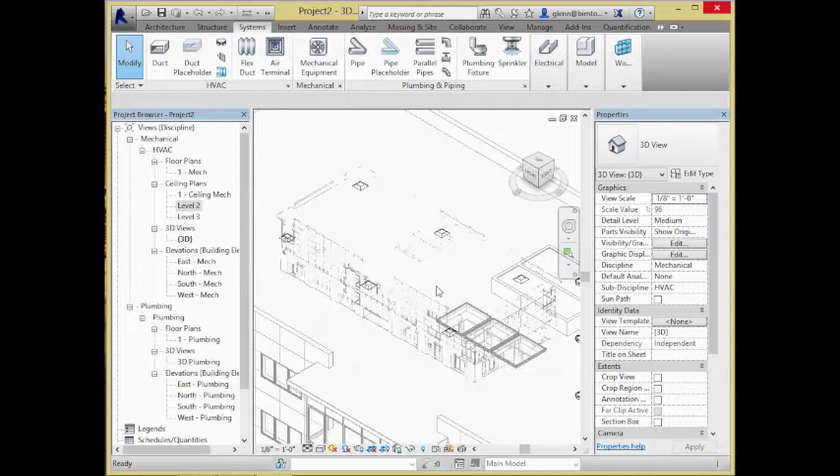You can see, oh, there's some ductwork kind of hanging around in there. There's some registers. They're not looking too bad. Let me rotate it around a little bit. You'll see they seem to be at about 8 feet above the second floor right now. That's kind of doing okay.

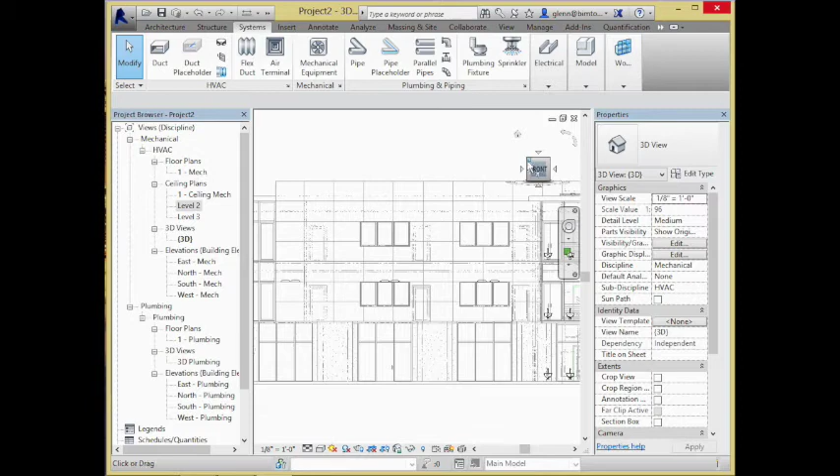Let me go through and do this. Let me rotate this around again. And what I'd actually kind of like to do is, in this view, kind of scalp off the top of the building so I can sort of see the ductwork so I can be placing in 3D very easily.

So to do that, what I'm going to do is turn on this thing called the section box. Okay, the section box you'll see is just hiding from us right now. That's all that's really going on. I need to make it visible. See if I can make it visible.

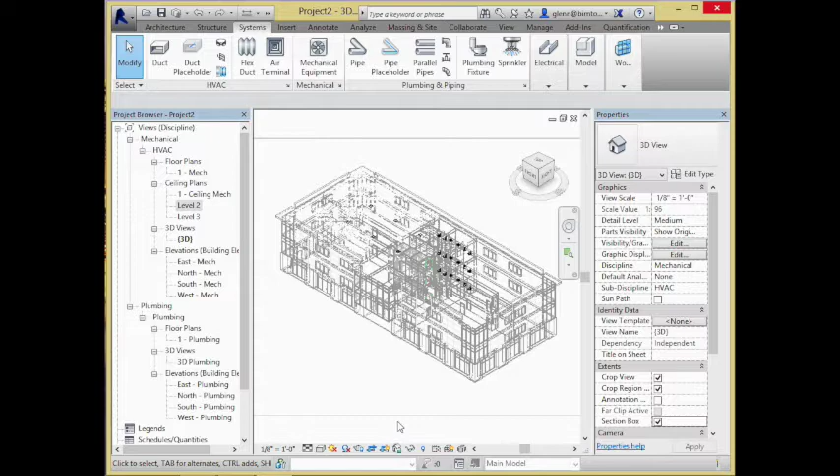Actually, it's the crop region. This is the things that are hidden. Let me unhide it, just so I can see it explicitly. There's the section box. Now I can push and pull on this thing.

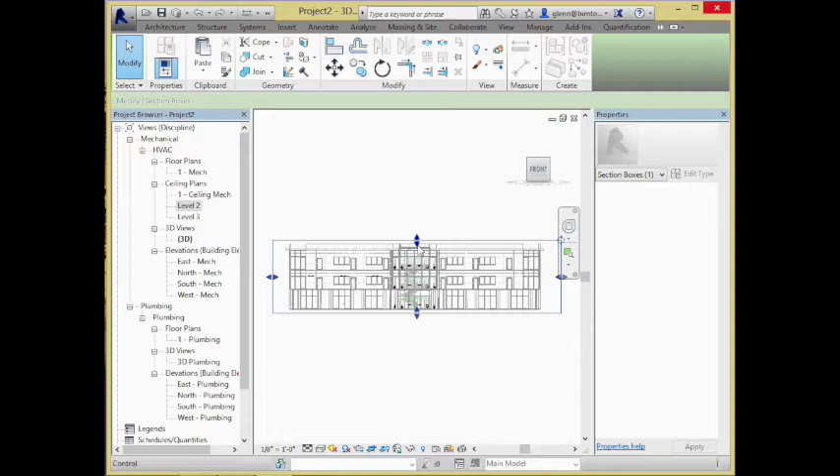The cool thing about the section box is you actually can sort of push and pull it in these dimensions too. So I can turn it over. Now I have the top of it riding just below the 3rd floor. So if I rotate this around again, I'm going to get a pretty good view of what's happening up there above this kind of space.

Again, the grayed out space, that's the linked model showing through. These ones that are more solid, those are the actual returns that we put in.

Okay, so I'm going to go back to that floor or that ceiling plan and we'll put some ducts in here. Okay, the duct tool is right up here. The duct tool just chooses a specific thing, very much like running pipes. Type of element, we'll choose the duct in there.

We have all sorts of different ducts available to us. We have rectangular ducts, we have oval ducts, we have round ducts, we have all sorts of different kinds of ducts available. I'm going to stick with the rectangular ducts for right now.

Rectangular ducts, what are they? They're probably the most common one that you see running around. There's this whole notion about, are they going to have elbows, or are they going to have mitered corners?

If we put elbows in, what happens is as I run a duct section, as we get any sort of bend, it'll make a nice elbow out of that. The nice thing about elbows is elbows are very nice and efficient. They're nice smooth curves. There's very less loss of efficiency at an elbow as opposed to a mitered corner.

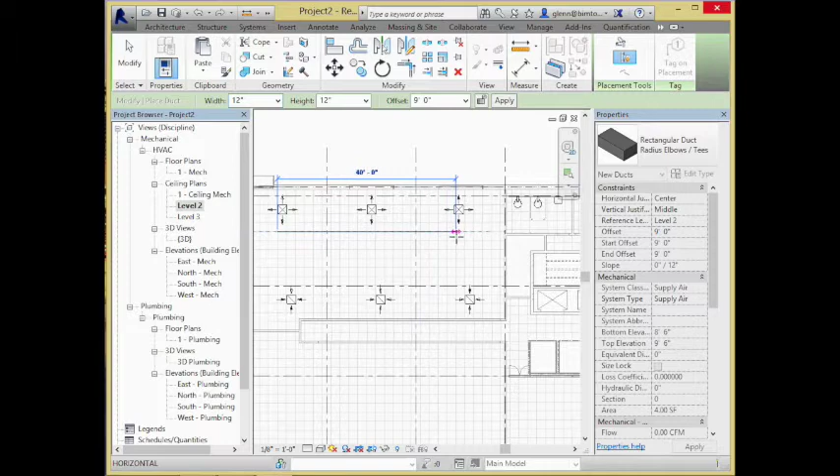That makes it easy. I'll just start - doesn't really matter which direction I draw it. I can just pull on out. We're not seeing anything just yet - let me think about why that is. Am I on level 2? I'm on level 2. Maybe I'm just drawing a single line, that's what it is. We'll fix that in a second too. So I got some sort of single line in here. I can either round the corner that way, or I can pull on down and pull in like this. But I'm basically putting a blue line in there.

Let's talk about what that blue line represents. That blue line in every duct - actually I should have shown you before I did it - you choose a system, whether it's a supply air or return air system. This was set to supply. It's a single line right now because at a coarse level, it'll represent it as a single line. At a medium or fine level, it'll actually show the width of the physical element.

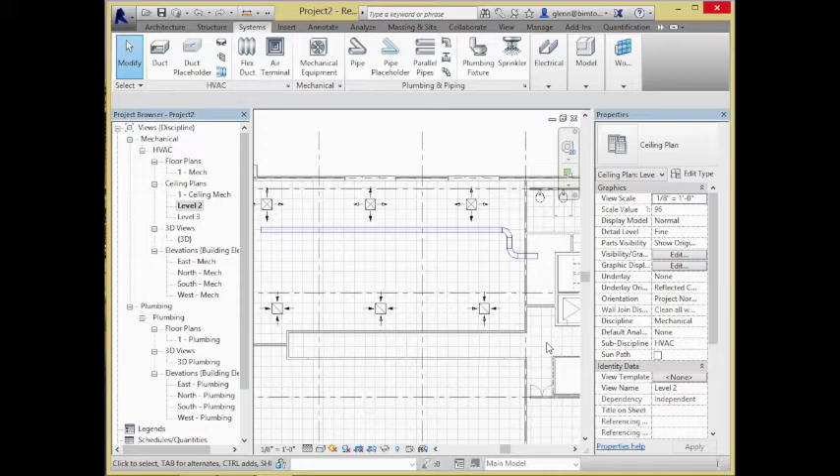So very much like beams and pipes, they do the same thing. At a coarse level, it shows just a single line. If I turn it up, it'll show the actual dimension. And you'll see that the nice thing is, as you go through and around any corner, it puts all those little elbows in, but you can also see that those elbows are pretty big in terms of what's going on.

So let me just run another piece for you, just so you get a sense of how it works flexibly. Okay, duct, 9 feet, that's fine - supply air versus return air. I'll just run one over to the other side of the building. So I'm coming on down, I make the corner, I make the corner. It'll just kind of keep rounding it out.

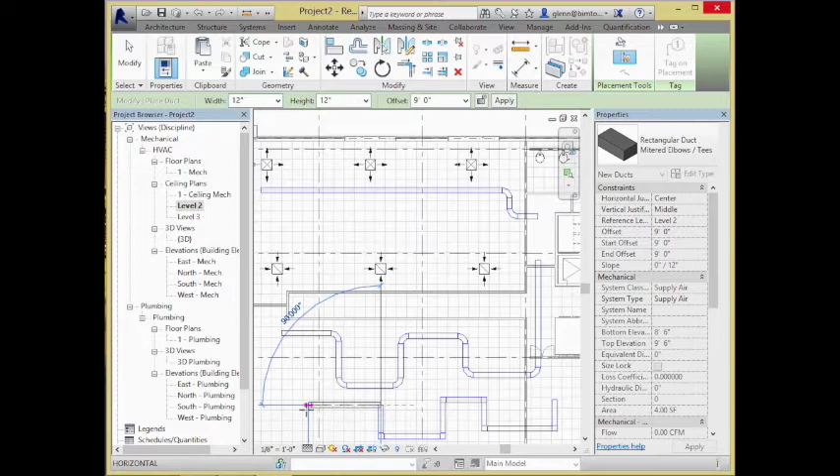I'll distinguish that from duct, supply air, but instead of radius elbows, we'll do the mitered elbows. It squares them all out. Any of those things will work. It's really just - this is a much smoother line, very few bends, much less loss of efficiency. This middle one has got those elbows, but it's still a pretty crazy path. By the time we're getting out here, we've lost a lot of the efficiency just due to the fact that all those bends are kind of cutting into the energy.

This one down here, this is probably a very bad sort of design. It'll get the air there, but I'm going to have to use a lot of energy to push the air out where I need it in that kind of design. So these are all just lines, so I can tab and get rid of them, kind of in the same way - just select them all. I can move them, whatever. It's just like lines, but it's very much like placing pipes where the lines turn into pipes. This is more ducts. Okay, now I've got these fantastic ducts.

They're looking pretty good. I am ready to start joining things together.

I have these terminals sitting there at 8 feet high, and I have this sitting there at 9 feet, but splitting 6 inches above, 6 inches below. The truth is, it's hard to actually make the physical connection, because to get an elbow in there in only 6 inches, it's just not physically possible. It's going to complain about that.

So I have a couple different things I could do. If I have a lot of space, I could raise that whole system. Now, I don't want you at 9 feet, I want you at 10 or 11 feet. But then again, I might be starting to run into the beams. So maybe I do or don't want to do that.

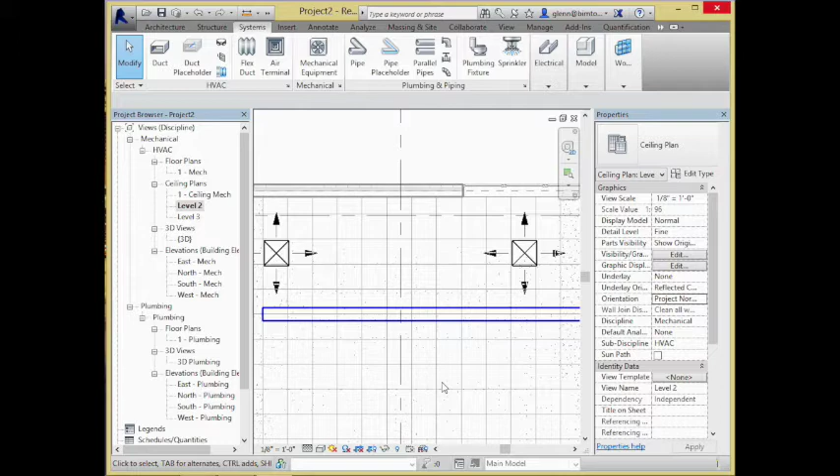The problem with hard ducted systems is they're really precise. When you have the sheet metal manufactured, it needs to be exactly in place—sheet metal doesn't bend. It's got a specific location, so you have to be very precise about where the terminals are located. Flex Duct, although it's less efficient, gives you a little more leeway if things slipped a few inches. So the compromise we tend to use is if we use Flex Duct, we'll use it for very short lengths. That's really the way we tend to work with that.

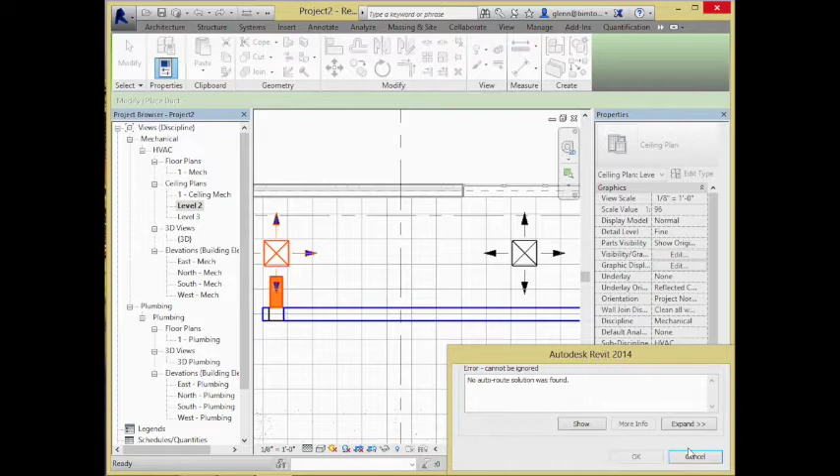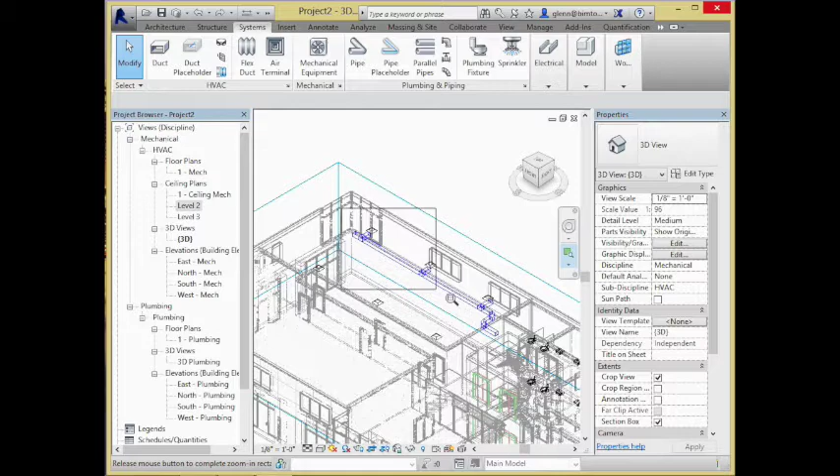So if, for example, I take this duct and get it ever so close, but I'm not going to get it right to the top—actually, even there, I'm too close because it's touching the arrow, so it thinks that it's joining in. What I'm doing is going through and pulling these things very, very close, but not actually getting there. Okay, so I got real close. Let me show you that in 3D so you can get a sense of that. I am so, so close, but not touching.

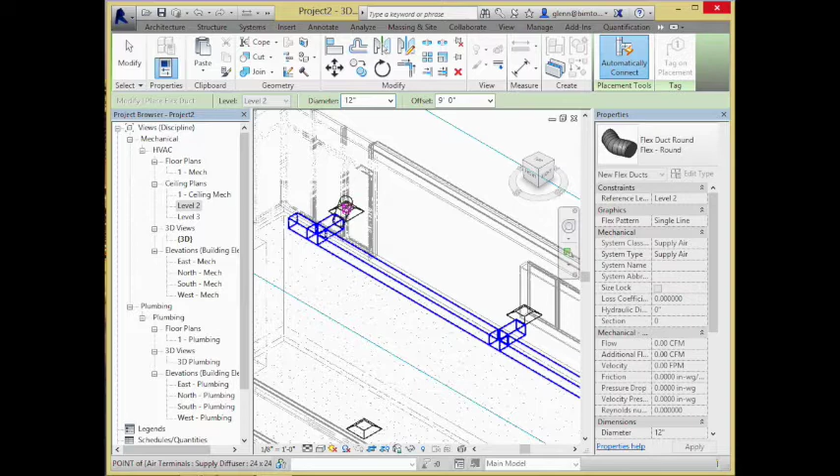And what I'll finally do for that last little piece is run this other thing called Flex Duct between the final little connection. I can do that either in 3D or in 2D. I'll run Flex Duct from the end here to the top of the terminal right there, and it'll put in that little bit that looks like dryer hose. Off in space—control Z to get out of there.

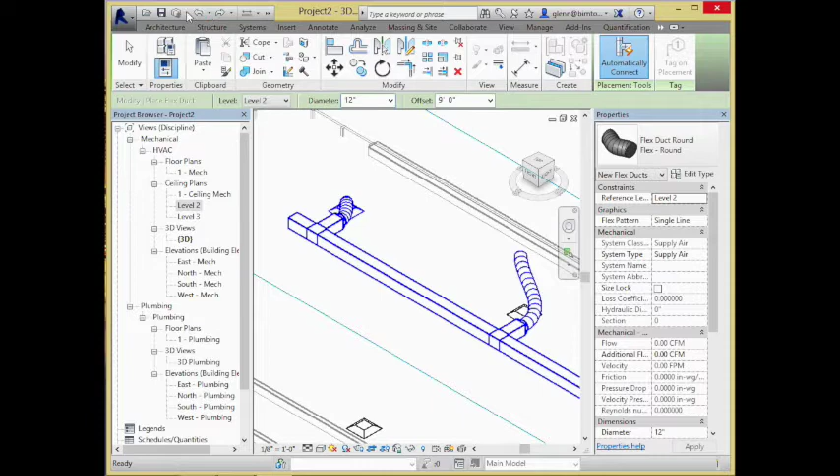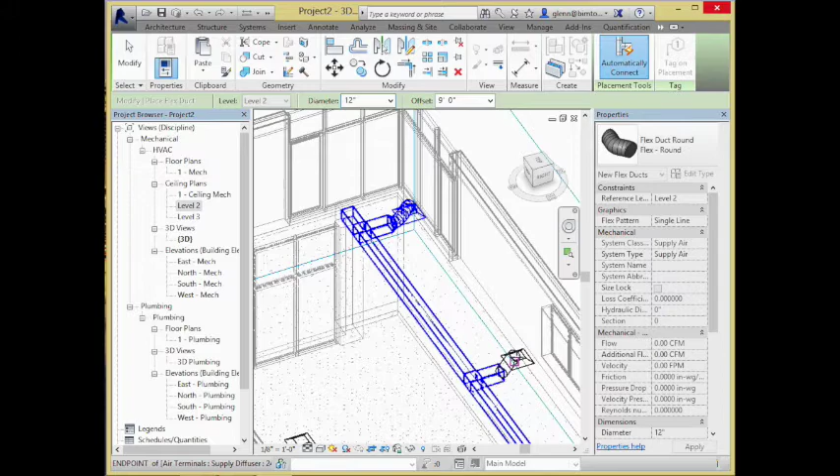Might need to orbit that around a little bit. That's funny, take you out, take the transition out. Let me orbit this a little and try that again. I might have a better chance this time. So I'll go from the end here, trying to get that top center—I'm almost snapping on it, but not quite. Let me zoom in. It's funny, now it doesn't really like me.

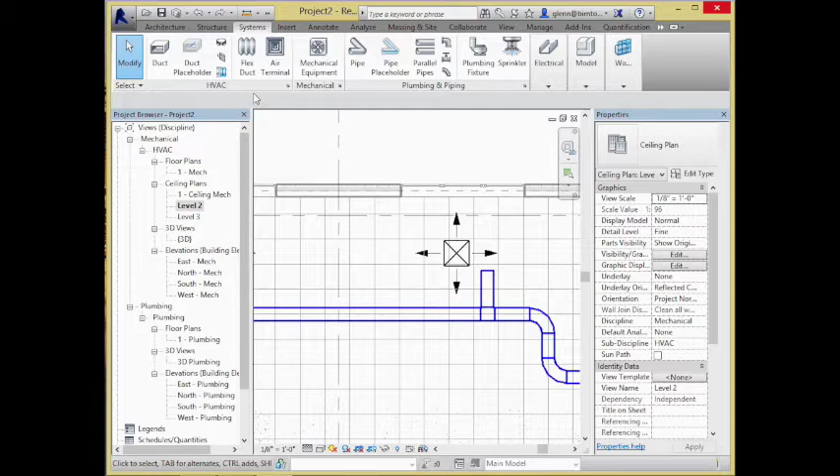There it is, okay, Flex Duct there. Again, let me do it in 2D so you can see it that way too. I'll take Flex Duct and run it from the end here to the top of that, and it'll put it in there.

So that's our supply side. It really is kind of that simple. You just run the main ductwork through, do the final connection, and it sort of takes care of itself. This is very similar to what we did with the plumbing systems, where I said go ahead and run the main lateral about where you want it to be, give it the big design decisions, and then just do the connection at the very end in terms of where the terminals are, where the plumbing fixtures are relative to the main lines. Similar concept—get the main line down there and then adapt.

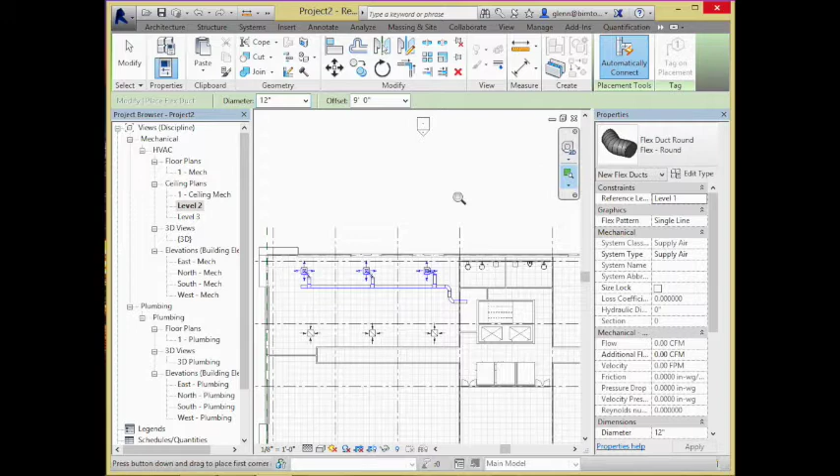Let's go and do the other side of this equation. Over here, so supply side out here, now we have the return side over here. On the return side, we're also going to run some ductwork.

We're going to run some ductwork. For this one, I'm going to raise it up a little bit higher, as opposed to being at 9 feet, I'm going to raise it up to 10 feet or 10 and a half. I want to experiment with the idea that I could have the two things passing by each other. The truth is, if I design this really well, I might not have to have them passing over each other. I might be able to just have the supply and the return running parallel with each other, but that would be a very fortunate thing.

I'm going to actually raise it up a little bit higher, because you'll see when I do raise it up, I'll just bring it on down.

Now for this one, you'll notice I currently have it set up with a couple different things that are sort of interesting about it. A, it thinks it's a supply side, and that's because when I chose it, let me take it out. Ductwork. I want it to be return instead, so let me switch it over that way.

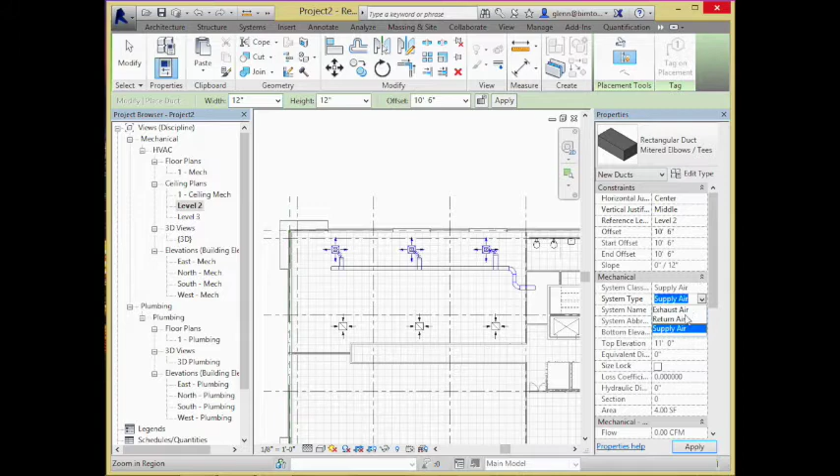The other thing is I still have it set to the mitered elbows. Let me go and put the radius elbows.

Okay, so there's going to be some sort of air handler or something happening back over there.

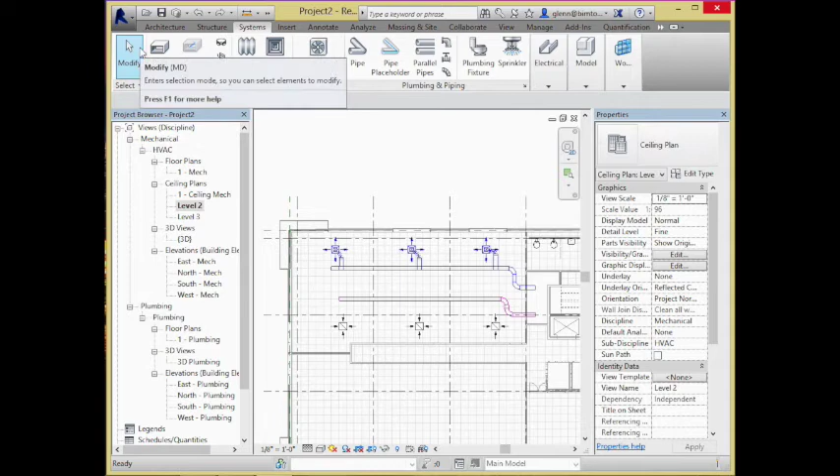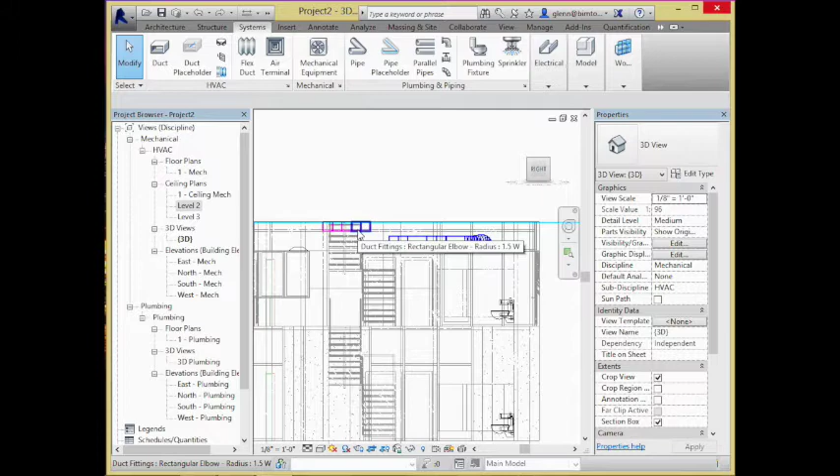Now, the cool thing is if you have a little bit of vertical distance, you can see just how you're doing in terms of the vertical distance. Let me rotate it a little bit. You'll see right now that return side is a little bit higher than the supply side. You can sort of see over here how, relative to the supply duct and their supply terminal, there's really not enough room in there to put some really good elbowy connection between there.

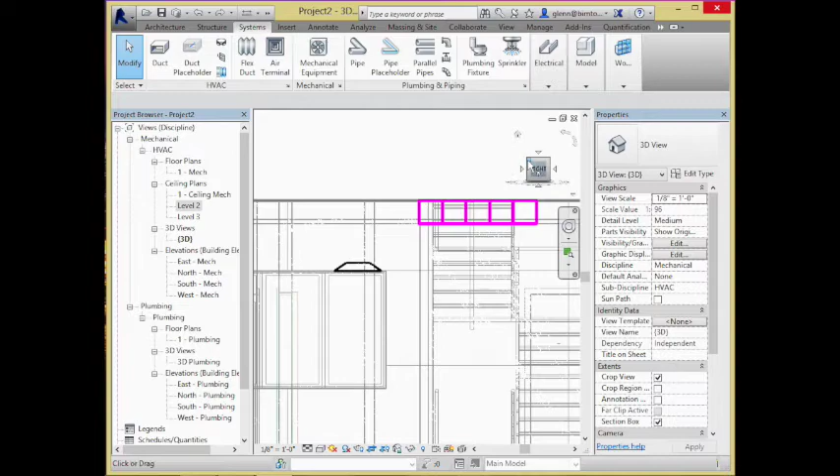On this other side, since I raised it up, I probably do have a little bit more room. It'll probably work. So I could go over here, and in the same sense, if there is enough room to help it route, I could just go through and choose that, connect into, and then choose a duct. And if it can, like, that's enough room to actually get the whole elbow in there. So if you do have room to connect into it, it makes it very simple.

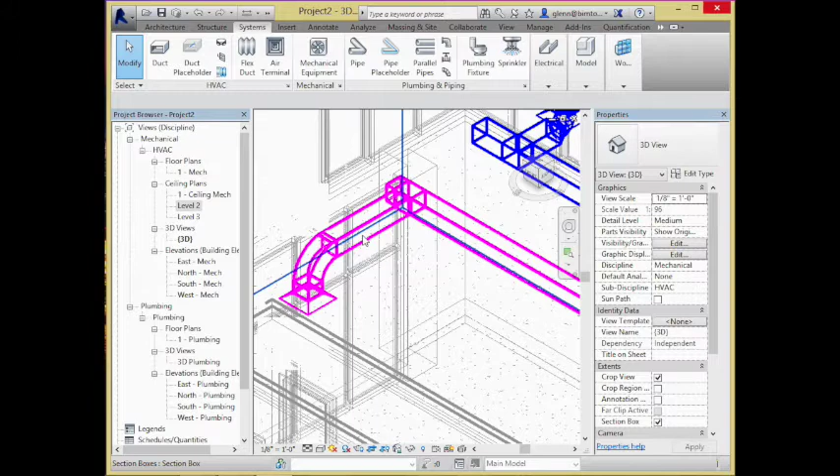It'll put a hard line connection in there. Of course, that has to be a very precise connection now because it's a hard walled connection. I don't have to do it that way, I could still use the Flex Duct, whichever way I prefer. But the important thing I want you to know is that if you're having trouble connecting in, 9 times out of 10, it's just that the geometry won't let you get the connection the way you want it to be. It just is too tight.

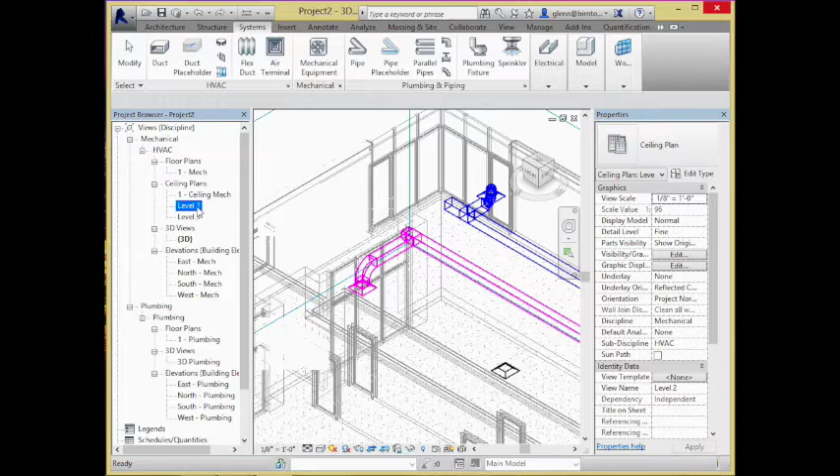So in that case, I might need to switch to, as opposed to an elbowed system, a mitered system, or do something with a Flex Duct. Either way will work. So same thing here. I could say choose, layout, connect into and bring it in that way. Or if I want to use that other strategy of using the Flex Duct, I can bring a piece out.

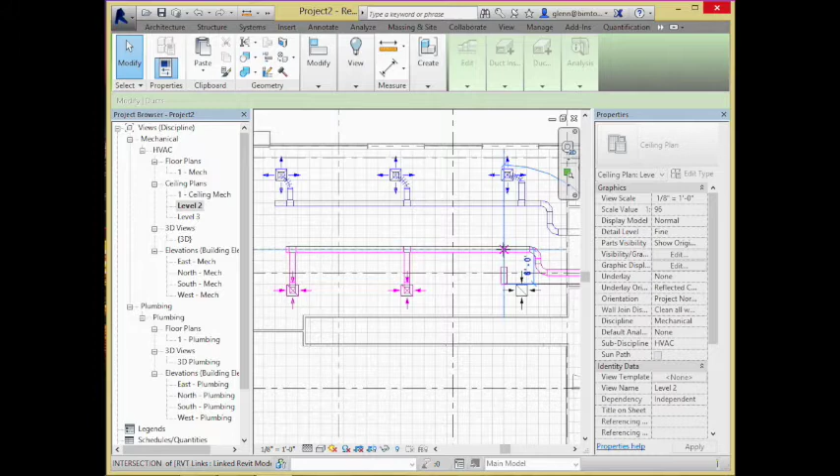Looks like that one didn't quite join right. Let's see why not. I'm going to think about why that's not joining in a second, because it should. Let's think about that. Ductwork, middle, level, that should be fine.

Okay, that worked that time. It's actually pretty smart about what's going on. I wonder if there's a minimum length that was at work there, or why it wouldn't let me do it over here from the center line. Okay, now it did, I just have to be right on the center line.

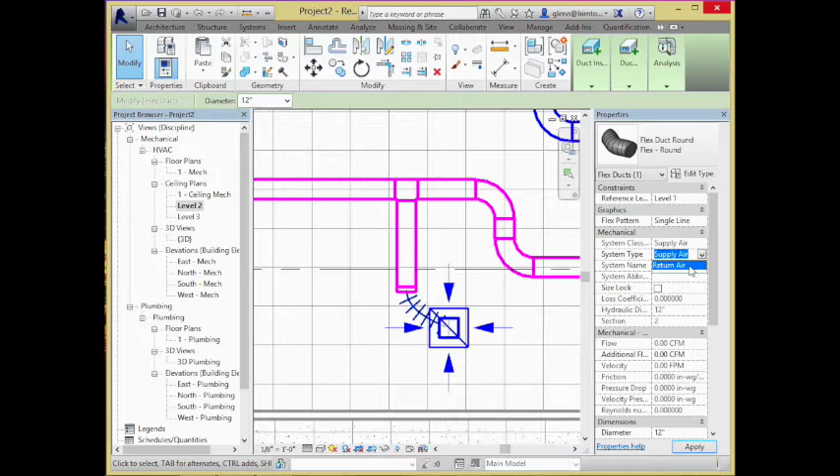Okay, so if I want to, I could use the Flex Duct way to connect the end of that. Okay, in this case, it's complaining a little. Let's see what's going on. It thinks that either the Flex Duct might be supply air. Yes, I need to make it a return air supply. Okay, now it's a little bit happier.

So either way, I got supplies, I got returns running through there. So here's what I literally have to do. I got the supply, I got the return, it's coming back over here.

I am driven by the number of terminals and moving enough air. I am driven by the whole issue of how am I going to get these things passing past each other and still not hit the beams that are running right above it. But what I will tend to do is actually go through and design this for one level, and after I got it working for one level, maybe even check to make sure that my beams aren't hitting it, then I can copy and paste it to the other levels.

It really kind of works that way, it's not too bad. What you'll run into more than anything in systems design isn't the engineering of the system, it's fighting the issue of geometry. If architects give you a very small amount of space to work with, you have a struggle on your hands. If you have a generous amount of space, no problem, it's easy. It's all just an issue of how much space, and people don't like to have excess space. It's this constant struggle about how much space you have and how you can squeeze your system in.

From the HVAC system design, it really is kind of that simple in a way. What's missing now is we have to put some sort of air handler in here that's going to introduce the heating and cooling and push the air through. And we can even size these ducts. That's pretty much where it's going.

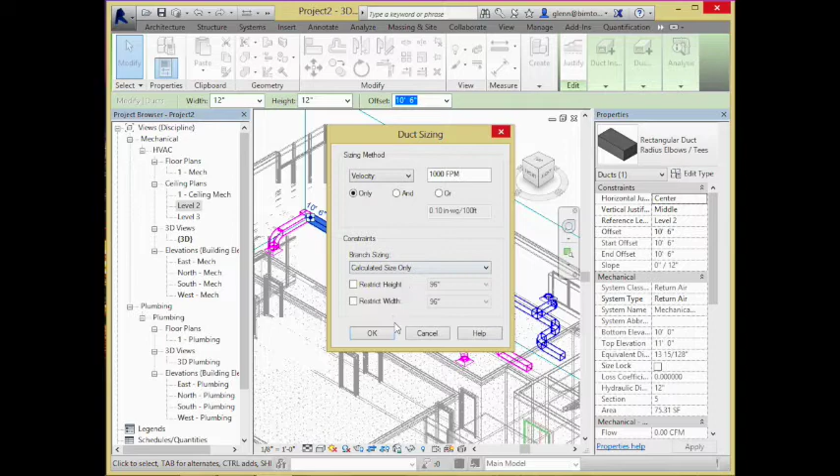Let me try this. Even in terms of here, add insulation, add lining, duct pipe sizing, just so you get a sense of this. There's this whole notion about how you want to size them, calculated size. I actually have to go put the air handler in, that'll go through and put it in there for me. But you can basically go through and choose the whole system, and it'll figure out the size that's necessary for every length. That's actually pretty cool in order to maintain the pressure or whatever it is that you're using as your design criteria.

So far so good on ducts. Does that make sense? Okay, if it does, let's transition into our last topic for today, which is model coordination.

Here's the deal: we've been creating these model files. The architect created their model file, and in our case, our structural is inside our architectural model file, but that's okay. There might be two separate files linked together. The plumbing person might have created their own model, the HVAC person might have created their own model. We've got to get all these things together and make sure, because we've all been working so diligently optimizing our own stuff that somehow it all adds up into a cohesive whole, and we haven't all basically tried to steal the same space.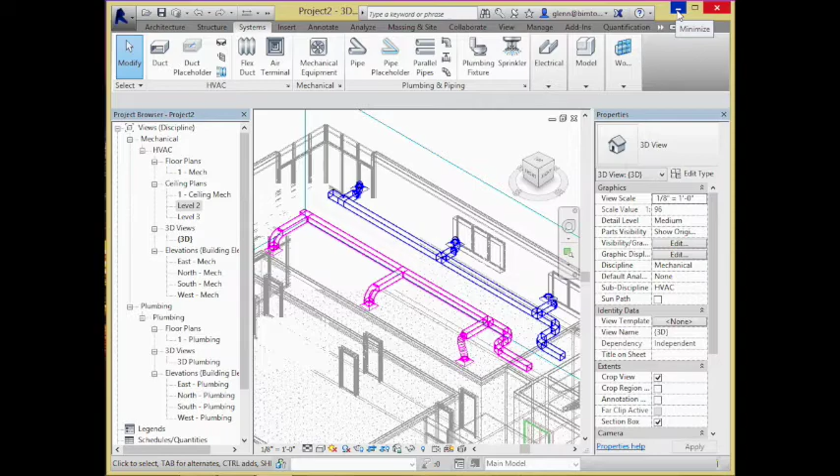That's really where we're going next. We're going to pull our models together, integrate them, then run some clash detection to make sure things aren't conflicting with each other too much. The tool we're going to use is called Navisworks. Navisworks has several different variations. There's Navisworks Simulate, which is good for 4D simulation, good for viewing things, but not so much for analyzing. Manage is kind of the big one, the big daddy that has all the different features in it.

If we open up Navisworks, it's not all that bad in terms of what's going on. It's a big old black screen, just waiting for us to bring some models into this environment. What we do is we append models into our environment, pulling them from other places. And when you're appending things, you've got a lot of choices.

I'll say append, and let's take a look at what our choices are. We can bring in Revit files, SAT files, SketchUp files, DWG or DWF files, or CATIA files. We've got a lot of different file formats we can bring in. Think of it like the Swiss Army knife of file merging tools.

Everything is available here, and really the goal of doing this is, if you're working with a consultant who isn't working in Revit, this gives you the ability to take their model file and your Revit file and get them together, so you can compare everything spatially. That's what it's really all about. So I'll stick with the Revit file format, and I'll bring in the architectural model, just so you get a sense of it.

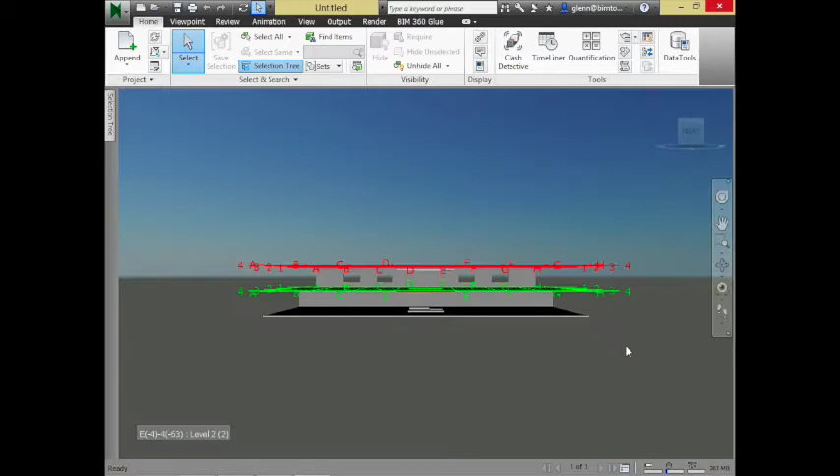This is a little bit different. It used to be, up until a year or so ago, that you had to actually save things out in a special format called NWC, a Navisworks cache file. Now we can just open directly, so you have one less step involved.

So here's the Revit architectural model. Not looking too bad. This architectural model we can play around with and explore if we want.

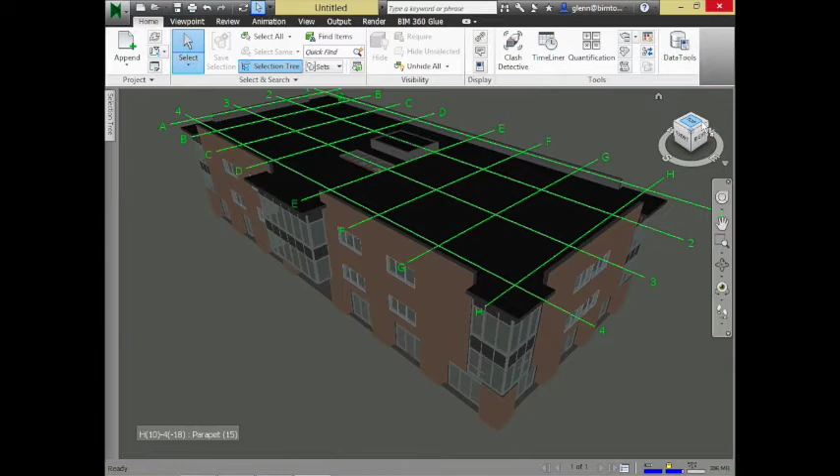In this environment, we can orbit it and do things like that. We can go through and move in. For example, I can do some walking. I'll walk on in. Looks like I'm a little tall right now.

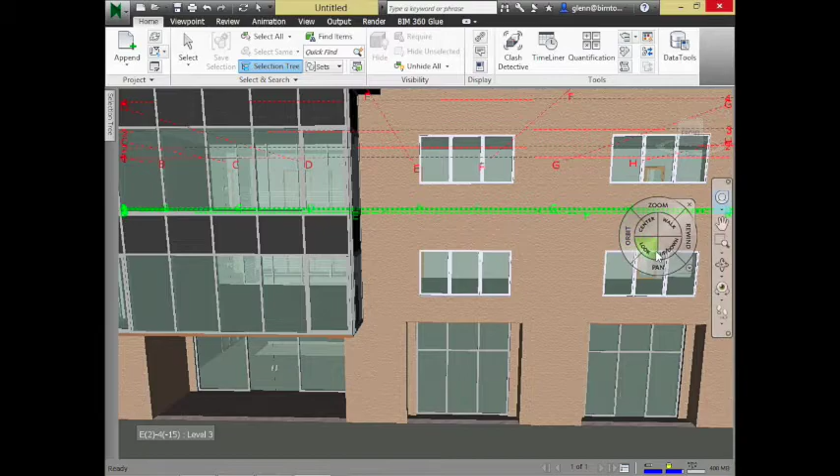I'm up on the second floor. Let me go down a little further. More the first floor level. That's looking about right. And I'll walk on in some more.

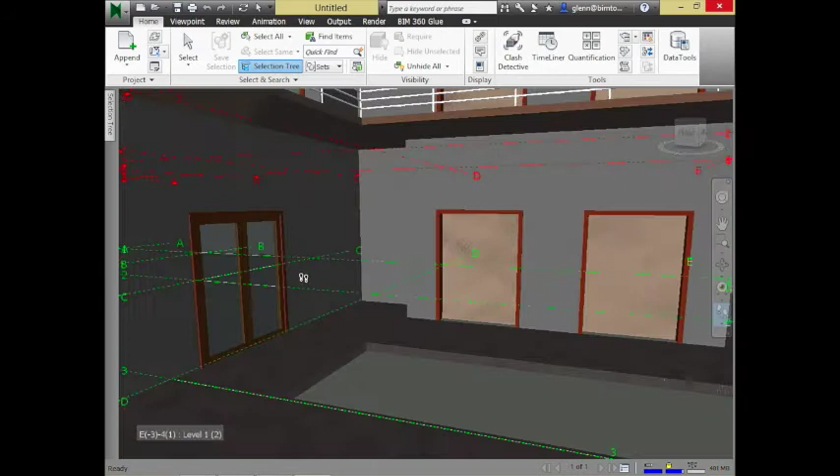I'm a bad walker. I tend to crash through things. We have this ability within Navisworks to either sort of turn on collisions, turn on gravity or not, depending upon what we want. How that works is, let me kind of look up for a second and sort of see up into the atrium, kind of look around. If I turn on gravity, how that works is, I got to find where it is. It's under Viewpoint, Realism. I could turn on gravity, that'll drop me on down.

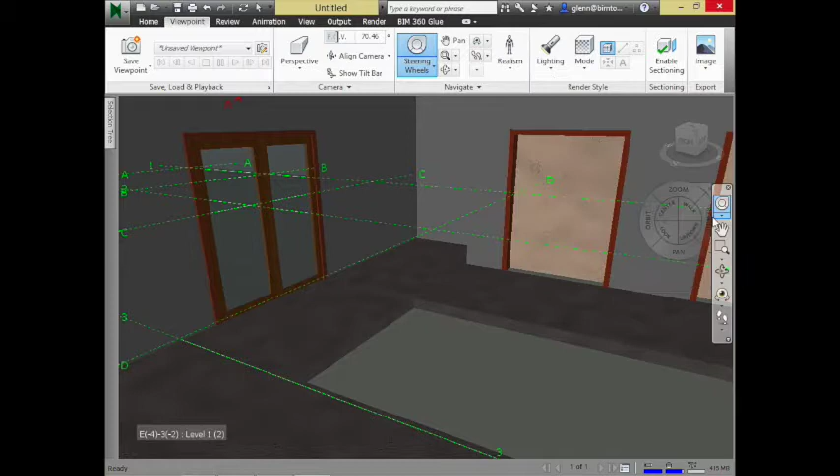Should drop me on down. Looks like collision turned on right now too. Let me do some walking again. Okay, I dropped on down to the ground.

Watch out if you turn on gravity and you're outside and you don't have a ground plane, you may just go dropping down to the depths of I'm not sure where. So that's bad.

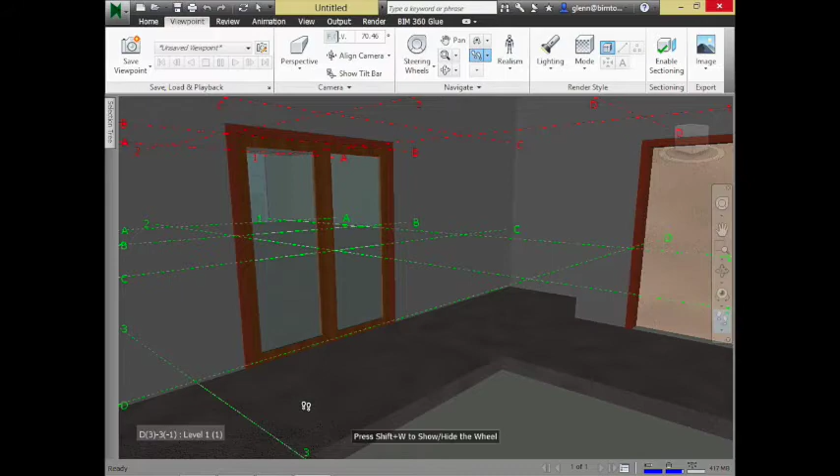Okay, let's walk around some more. I'm going to try not to fall in the hole. I want to get in there. Oh, I can't get in there. And why is that? Because I have collision turned on right now, and collision is keeping me from walking through things like doors. So I need to learn the keyboard shortcuts so I can do this better.

But I'll keep gravity turned on. No, I don't want gravity, but just collision. There you go. Oh, come on. Oops, other way. Oh, it's interesting, I can't get gravity without collision. That's what it seems to be. I'll turn them both off.

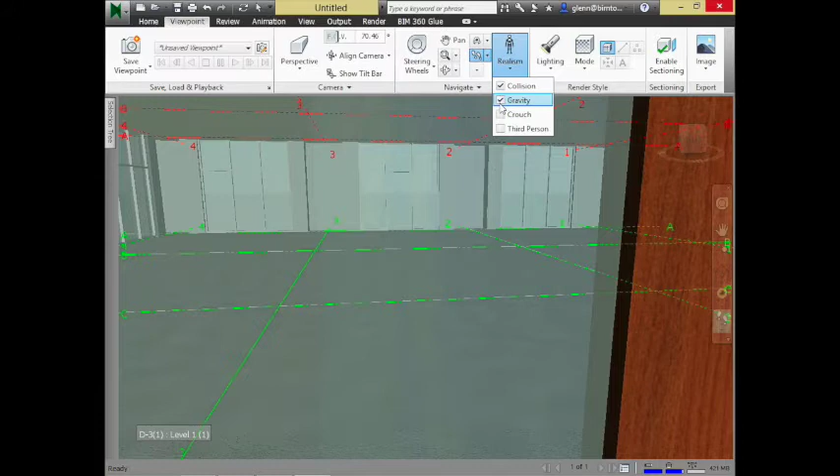Go crashing through. I'm looking around. Okay, with just my architectural model, this is only marginally interesting.

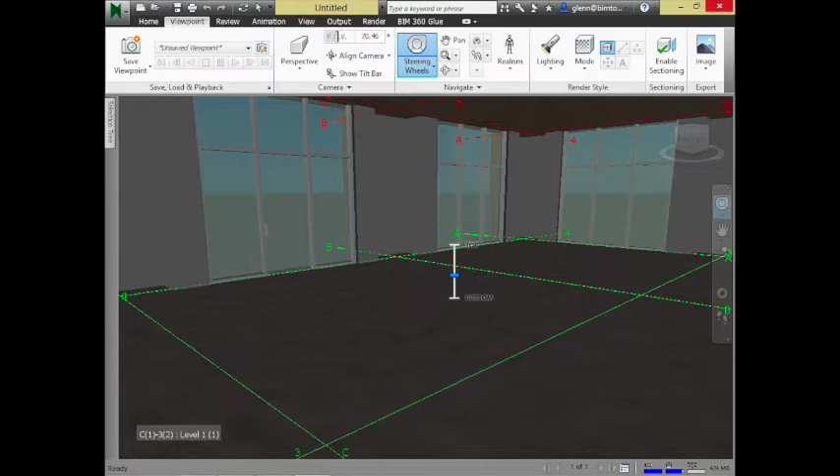Okay, let me go on up to the second floor just so you sort of take a look at that. I'm going to go up. And because I can transcend time and space itself, I can go crashing through all these different things. I went too far, I think I'm up on the roof. There we go, I'm on one of the upper floors.

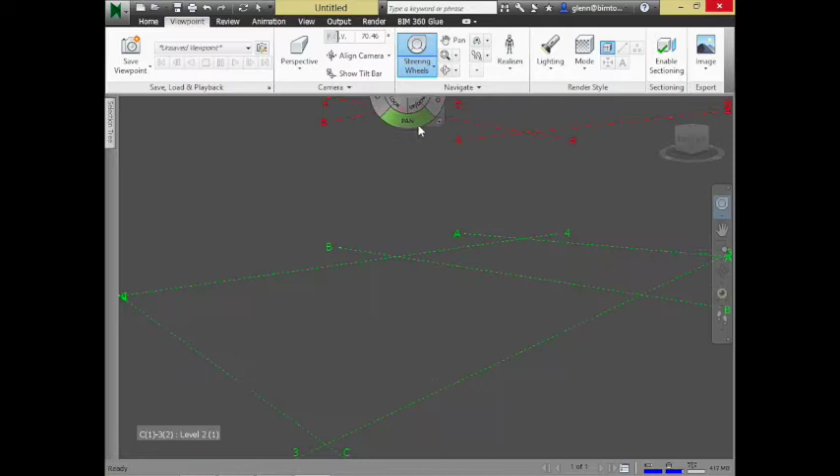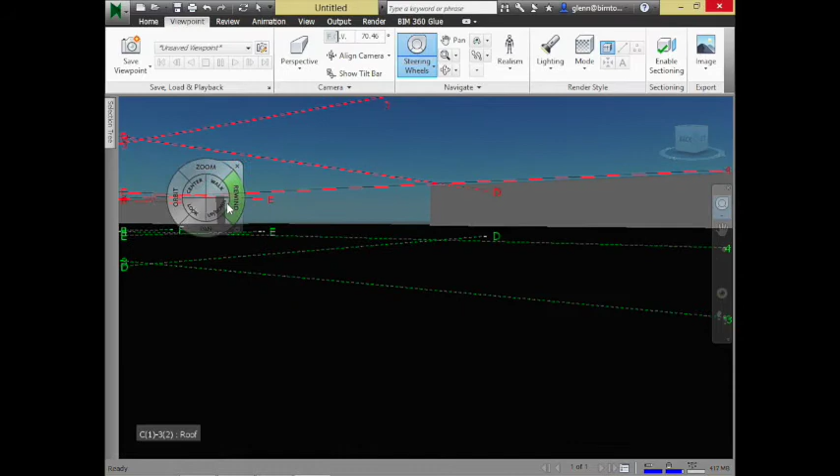This is so funny. I want to be there. That's that level. Looks like I'm clipping in some funny way. Hang on. Do some looking around for a second. No, I'm definitely up on the parapet. I'm trying to go down in a very limited way.

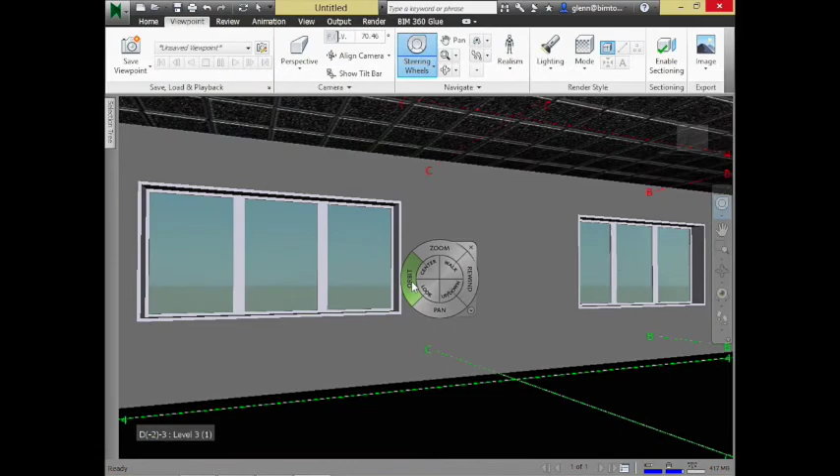Let's see what's going on now. Okay, now I'm at the second floor level. I can tell that, so I'm looking up, I'm seeing the suspended ceiling. I'm in the office space. Looking towards the corner window. That's where I want my desk.

Okay, so I got this basic thing set up. I can merge together other model files. So, for example, I can go through and go back to home and append some other things. Let me get the structural model turned on. Okay, you saw some structural elements show up in there. I have some columns coming down. It looks like I have some beams kind of floating around up in here. I got some K braces over here.

We'll think about where that's going to fit into things architecturally in just a second. I'm also going to go through and append the structural model, or the MEP model. Bring that in. Okay, and that doesn't look like we're seeing very much just yet. Okay, so I can bring all these different things together and sort of see how things are hooking up.

Now, if I've done a good job, if I go through and have all the different elements hanging around, I've got them all set up on the same coordinate system. They're all going to line themselves up very nicely. If they didn't, if you brought them in and they're just out of alignment, you can transform a model. You can push a model over.

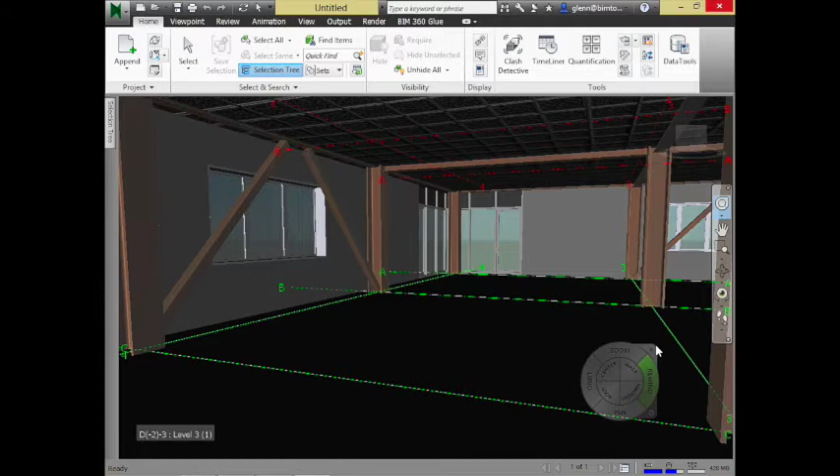So we have something called the selection tree. It'll show you all the different models that are in there. And if necessary, we can go through and transform a model. We can shove something over and push its origin over so many units X, so many units Y, so many units Z, just to kind of get them back in sync.

Because if your consultants didn't all give you things coordinated to the same system, you can set that once and it'll remember it as they update their files every time. Since we got them all generated from the same system, we're in pretty good shape.

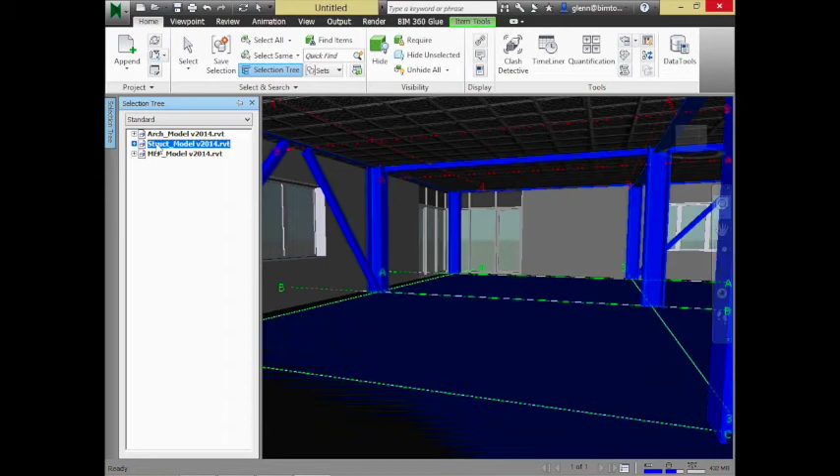Now, in terms of this model and what's going on, we have this notion of a selection tree. I can choose different elements like the structural elements, I can choose the architectural elements, or I can actually choose sub-pieces thereof. For example, in the architectural model, let me see if I can find the ceilings.

Which level do they belong to? So you have ceilings on level 3, I have ceilings on level 2, or I have ceilings on the roof level. Okay, that's that one right there.

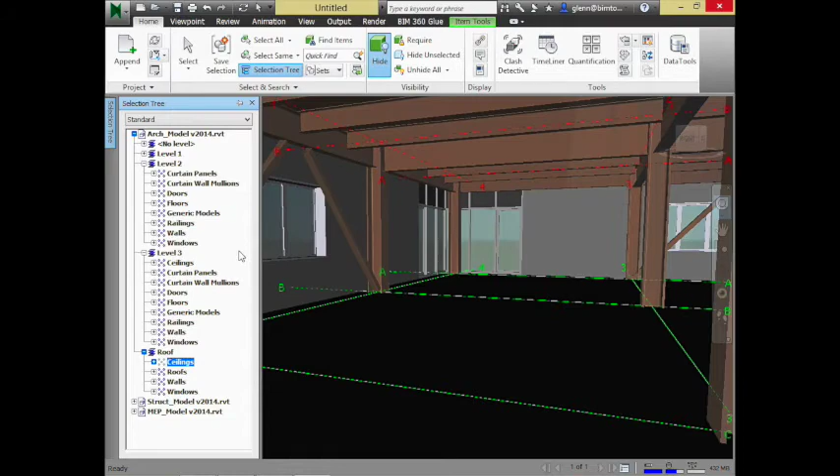If I want to go through and hide the ceilings, or some element of the model, I can just say let's go through and hide it. It'll turn that off temporarily, and then I can get a better look at really what's going on in the ceiling plane right now with all the structural elements in there.

Again with the selection tree, I can really turn off whole classes of things. If I want to turn off the whole architectural model, I can. Now I'm just looking at the structural model.

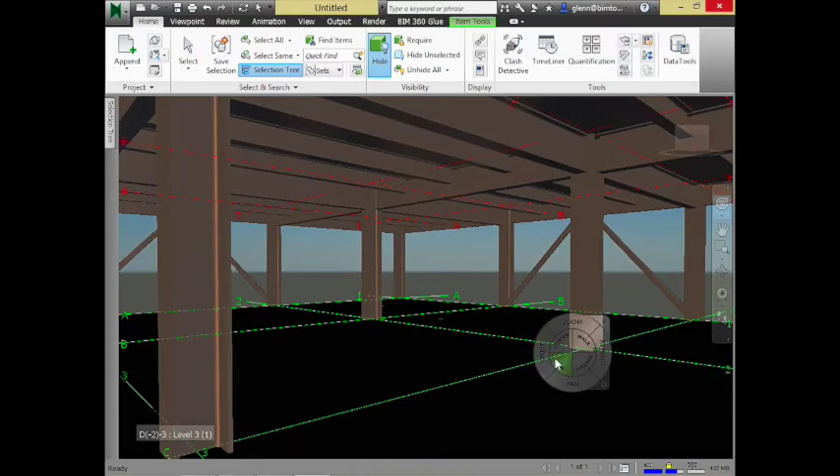Let me orbit around a little bit. And there we have some ductwork running over on that side. This isn't the ductwork that we just did a few minutes ago. This is some ductwork that the student put in a couple of years ago. Let me walk on over and see if we can figure things out.

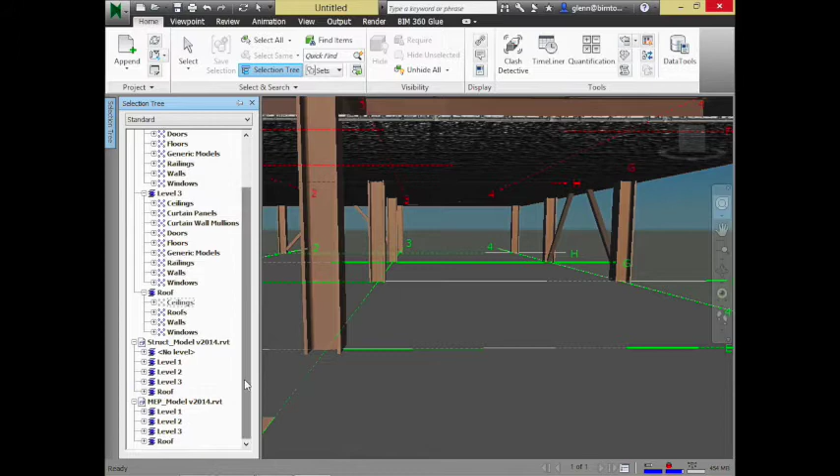Let me see if I can turn off that ceiling too. Actually, even in here, I should be able to. Is it in the structural model? I think the structural model, or no, the MEP model has some ceilings. That's where that one's coming through. Let me hide that. Okay.

So I got that ductwork hanging around in there. And you might notice as you go looking through that we have a problem or two kind of set aside in here. You'll see there's a piece of ductwork. This, I believe, is kind of my supply or my return. It's basically running on, and where it's located and where the beams are located right now are going to get me in trouble. They're basically trying to occupy the same space. So this is a problem.

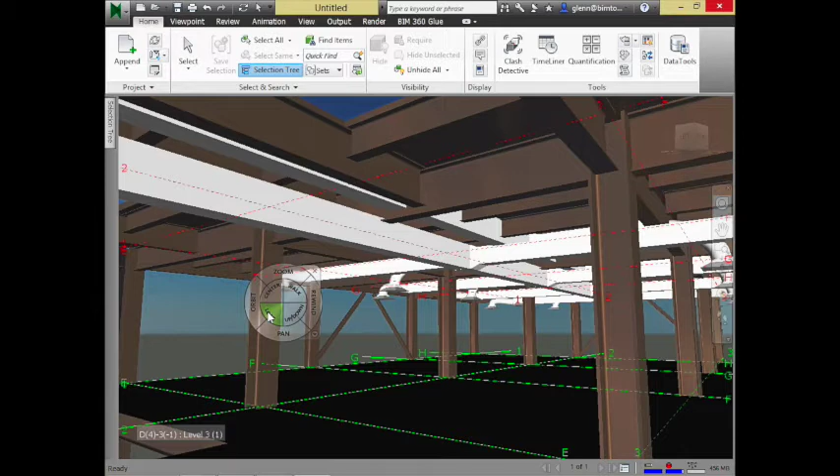Okay, what do you do about this problem? Well, you can't just go walking around in the space and noticing things. We could go through and say, okay, I'm at this view right now, and I would like to go through and save a viewpoint.

Okay, and I have some beam clashes with ducts. Okay, and I can save that. That way I'll be able to return to this pretty quickly.

So if, for example, I switch my viewpoint and I do something else, now I'm looking down, and if I change back to that, it'll take me back to that viewpoint. So it's just saving a camera shot, like a snapshot. The nice thing though is it's a dynamic snapshot. So later on, if I fix something, I can return to this and see if it's still broken.

The other thing I can do in this is I can do some reviewing. I can go through and say this is not good, this is bad, and put that in there and send that over to you so you can go ahead and fix that now.

It's just really a way of communicating about what's going on with the models and being able to save those as viewpoints. But just wandering around in a model and stumbling across things that are wrong, you'll find a lot of stuff. Architecturally, I always find a lot of stuff that isn't quite right just by wandering through and seeing things that aren't quite there. You might want a more systematic way to approach this, and they have that built into here.

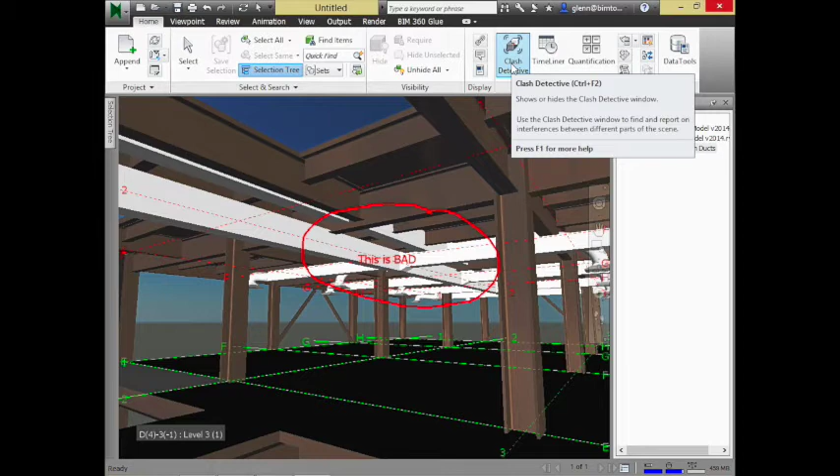It's called Clash Detective, and let's talk about how you use it, because it's something that you'll want to know about. There are a couple big tools in here. Clash Detective helps you find spatial conflicts. Timeliner helps you do a 4D simulation. Quantification helps you pull quantities out and actually prepare the makings of an estimate. But we'll focus on Clash Detective for right now.

Clash Detective looks something like this. I'm just going to close those viewpoints over there.

Clash Detective is all about the notion that we'd like to be able to intersect different things and quickly see where things are overlapping. As you're going through clashing things, you could clash the entire structural model versus the entire MEP model, and you'll get a lot of valid clashes, and some things that aren't really valid clashes, just sloppiness in the way we model things, like when a beam intersects a ceiling plane without a proper cutout. So you figure out valid clashes versus allowable clashes, and we can intersect entire models.

I'll just do that tonight because it's quick. Next time we'll do this with more control, intersecting just a piece of the model. So instead of the entire structural model versus the entire MEP model, we'll say, how about if we just get those horizontal beams versus the ducts? That would give us a smaller list of clashes, something we can control a little more.

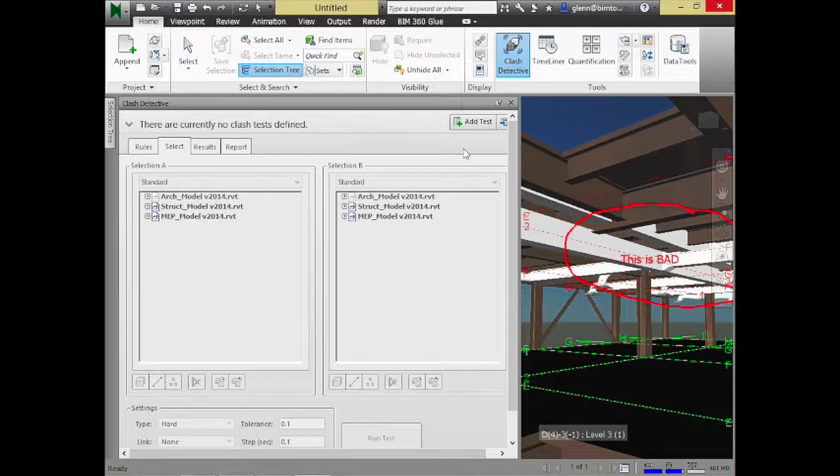But for now, I'm going to add in the test. I'll add in an initial test, and this is a big, gross clash test, okay, which is everything. You'll see there are currently no clash tests right now because we haven't defined anything. But if I want to compare the structural model to the MEP model, just set them up side by side in terms of what we want to compare with each other, I can say run the test.

We can think about different types of tests we can run. There are hard tests, where things actually physically have to intersect. There are clearance tests, where things just have to be within a certain range of each other to report a problem, useful if you need a certain amount of space around some insulation or ductwork—it'll tell you if anyone is violating that clearance zone. Duplicates find two objects that are physically in the same place. But I'll go for a hard test right now. We can set the tolerance, meaning it has to intersect more than a certain amount to be considered a clash. That's the whole issue of whether you allow things to butt up against each other, or whether they physically have to intersect.

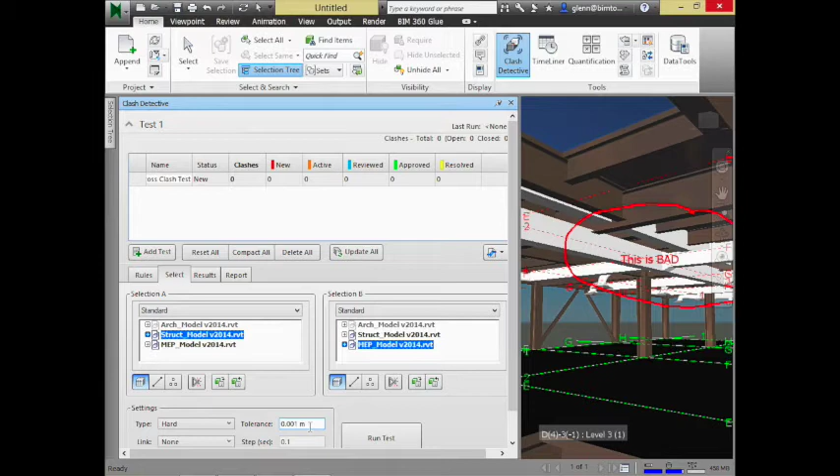I'll run this test. See what's going on—it's found 87 things right now that it considers to be clashes. In the scheme of things, that's not too bad. As we go through and look at them, you'll see there are all sorts of variations in here.

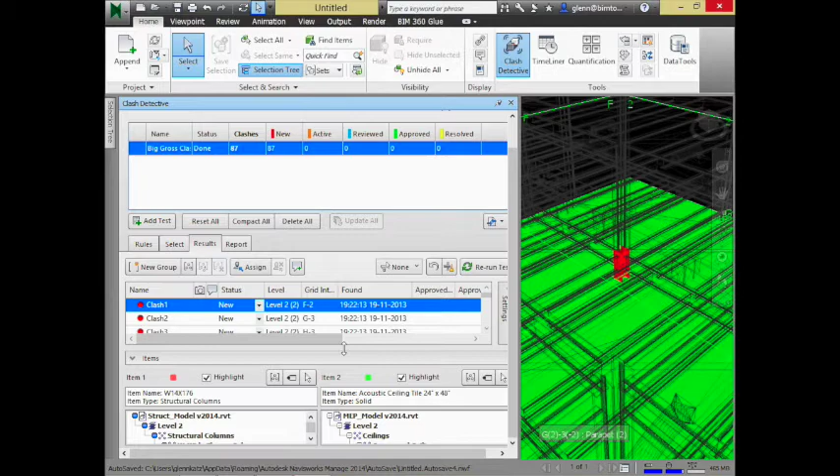Let me see if I can highlight some of them and show you what they look like. My screen is very squishy because of the way it's on the projection system here. But if I go through and choose any of the clashes, a couple things will happen. Down here at the bottom, it'll show me what the elements are. So I can see there's a W14 by 30 conflicting with some rectangular duct, and over here it's going to show me—looks bad, that seems to be an issue.

Okay, that's a good one. So I need to go through and probably assign something to this. In terms of its status, it's still new. In terms of assigning it, let me assign this to Glenn, and this is going to be one of my must-fixes.

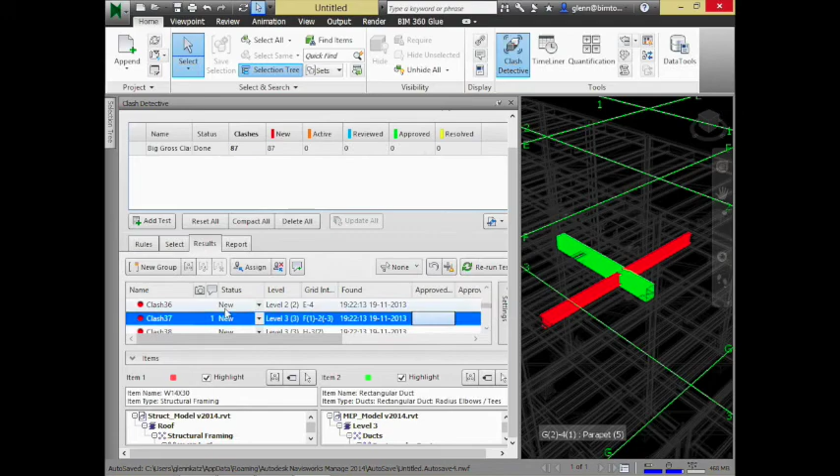Okay, go on down—looks like another one with that same characteristic. I might have a bunch like this. Let me go up to the top. You'll see some things that aren't so bad. In this case, there's some structural bracing intersecting with the ceiling plane, and that's actually okay, because I just didn't do a very careful job modeling the ceiling where the structural piece would intersect it.

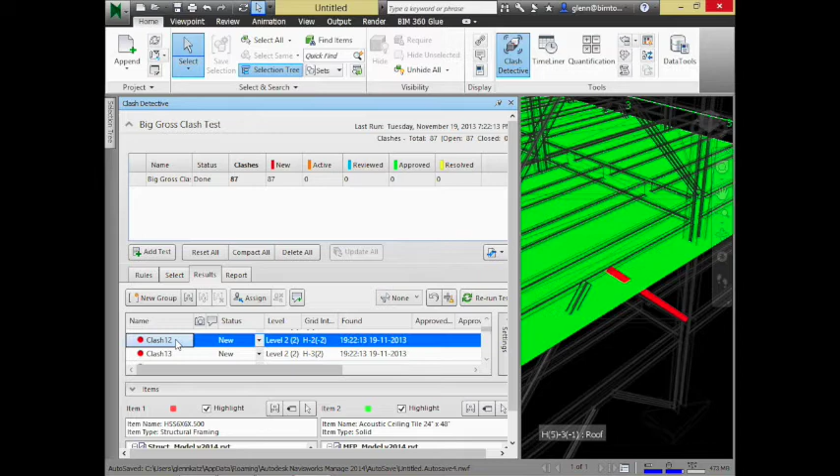So you're going to learn to distinguish between allowable clashes and clashes you care about, and kind of group the ones that you care about. It's going to pull on down here—what's down there? That's some wall intersecting with structural framing. I'm not going to worry about that too much.

Again, what do we have in here? Some sort of structural framing with a duct fitting. That'll be one of those that, again, I'm going to assign to me.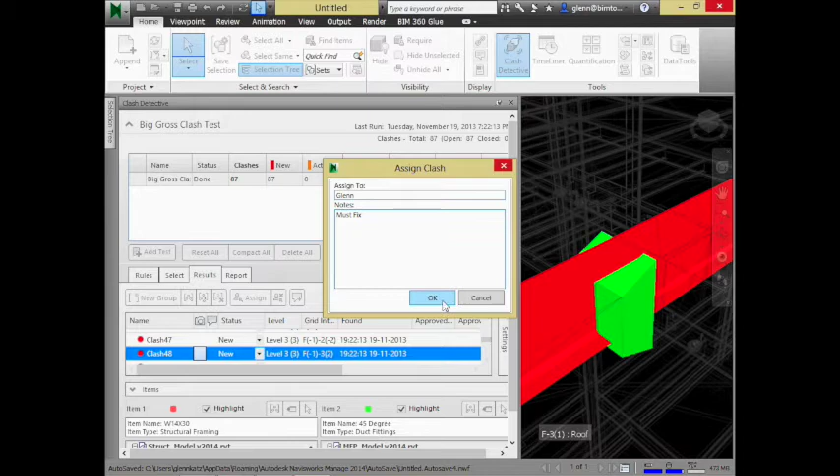Or some note that might be a little bit better in terms of what's going on. So I start creating this sort of list of things that need to be fixed. We can tally them up there.

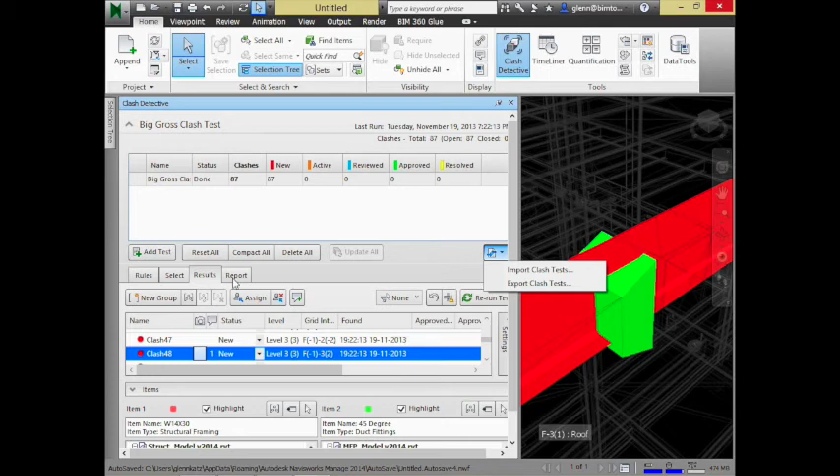If I go through and create a list of all these different things that I want to tally up, I can go through and produce some sort of report to help me understand what this is all about. I'll switch to the report tab, and I can go through and create a report.

I can create a report of a current test, or I could run a whole bunch of tests. In industry, instead of doing the entire structure versus the entire ductwork, they'll run a bunch of little pairwise tests that are easy to control - just the ducts versus the joists, just the ducts versus the major girders. We sort of do that in smaller sets based on who's likely to have to resolve that type of issue, because it really gets down to creating a bunch of issues and controlling that.

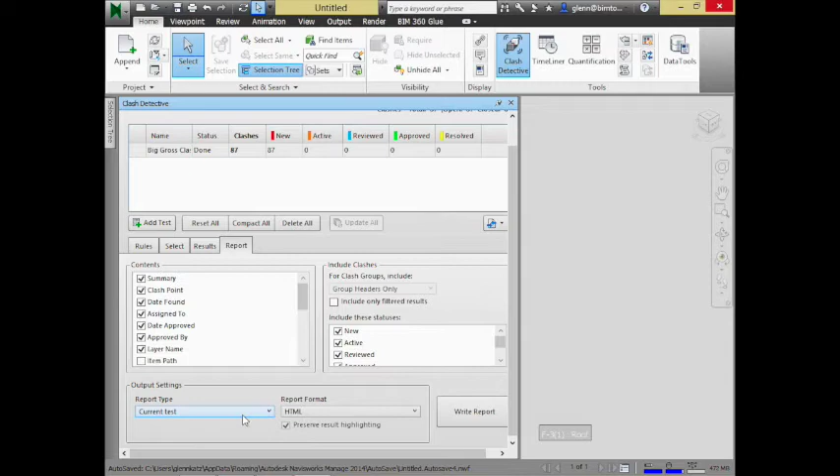So I'm going to select the current test here. I'm going to give it a report format - XML, text. I actually like HTML as a format. I'll say write a report, and put it out there somewhere like on my hard disk.

It'll write a report for me, and the reason I want to create this report is that later on I can send it to you and let you know what all my clashes were. Or I can subset this a little bit so I only print out the ones assigned to Glenn or any specific person. That way you have some control over who gets what list of clashes you want them to take care of. But once I create something like that, let's go to Documents and see if I can find this thing.

So what's in here: for each of the different clashes, it'll tell you what the element is, what the type is, how to find it, and how big the clash is, as in how much the intersection is. Structural columns and acoustical ceiling tile - I'm not going to worry about that.

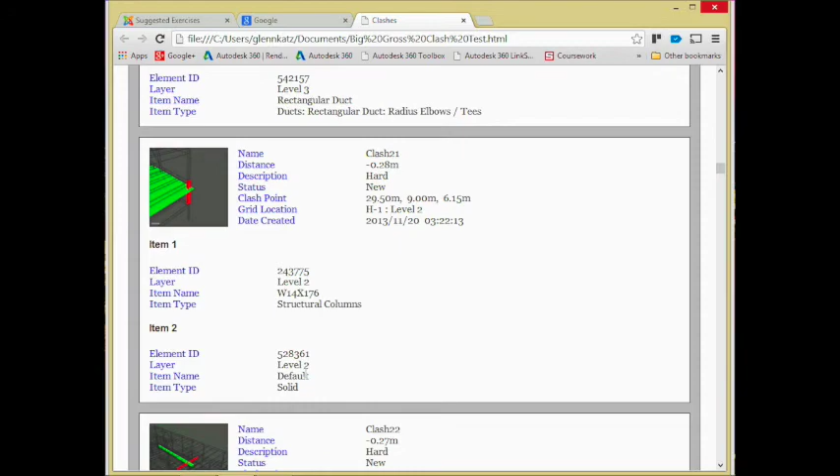I probably should knock that out and just say that's allowable. Structural columns versus some solid - that's interesting. Rectangular ducts versus that one, I'm going to care about.

So what I can do is go back over in Navisworks - there's Revit, and the Navisworks. Did I close Navisworks? Where'd it go? That's funny, I think I closed it.

We could run that clash test. We can go through and decide that things are not allowable. Let me go ahead and append those in there again real quick, and I'll save this away, and we'll be done for the night. Okay, I'm going to append those things.

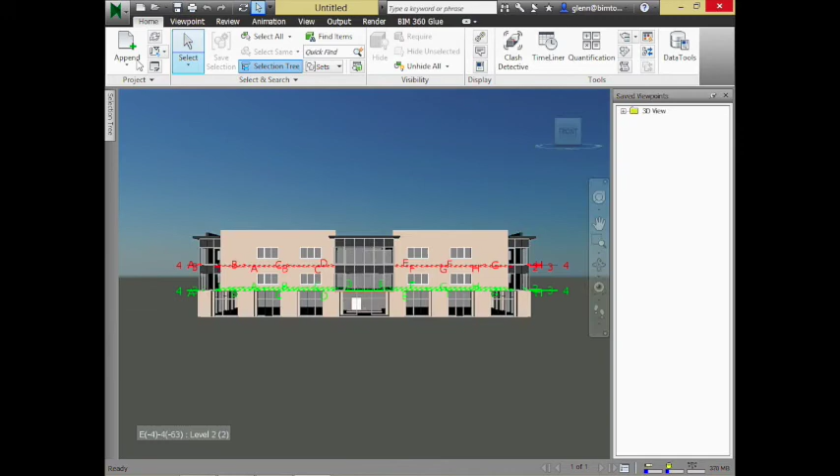Let me bring in that structural model, and let me bring in that MEP model. Okay, beautiful. So again, I can run the clash tests.

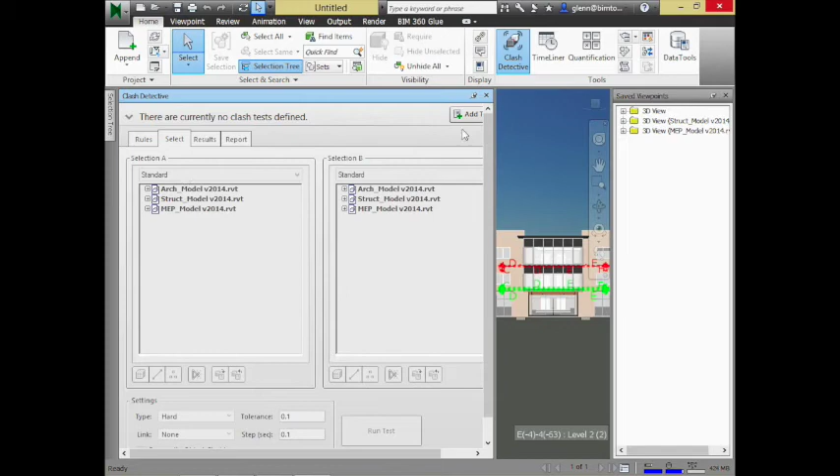Add a clash test, run this, run that. I got more stuff that wasn't hidden this time. If I go through and want to decide that some things are allowable, I can change the status - for example, it's reviewed, it's approved, it's resolved. I can just decide I've reviewed it and I don't care about it, and then I don't have to worry about it. It won't necessarily show up in the report.

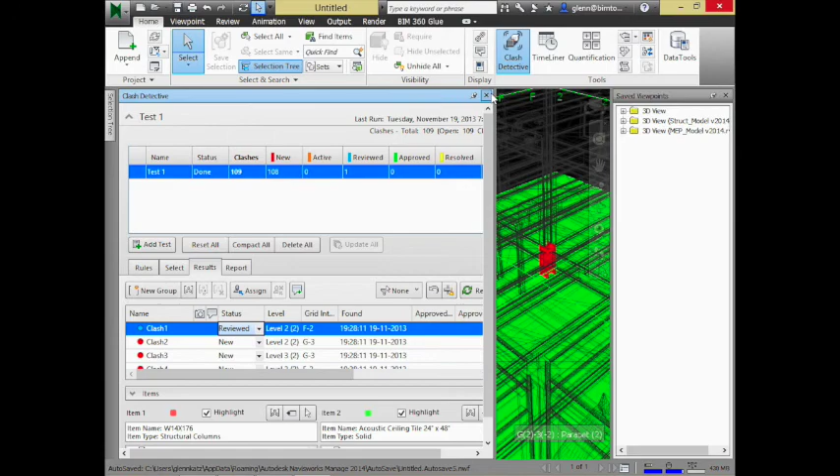Okay, so after you create these clash tests and you're feeling pretty good, if you want to share this with other people, here's what you can do. You can save this away - we have a couple different formats we might want to save things in. A Navisworks file set is one option. It is a series of coordinated files where the files are still externally linked to it.

A Navisworks file set is really useful when you want to give someone the results of your clash work, whatever tests you set up, but you want the files themselves to still be separate - they can still change, because it's just links to files, and they'll always be updated as we keep going. The other option you might consider is an NWD file, which is a Navisworks document. That's actually locked in time - it doesn't put active links to files, but stores the data currently loaded as a snapshot in time.

The nice thing about that is if I want to compare what's happening today with what happened two weeks ago, an NWD file gives me that snapshot from two weeks ago, so I can recreate exactly what the files were, what the states were, what the clashes were at that point in time, and I can take a look to make sure I'm making progress.

So the big changes are: NWF is great for live, active access to the files. NWD is a snapshot in time, locked in time. But the other good thing about NWDs is I can give you an NWD and you can look at it, but you can't really change anything inside of it. It's locked in time, so it's not a bad way of sharing things with people when you don't want them to change it on you. So watch out for this.

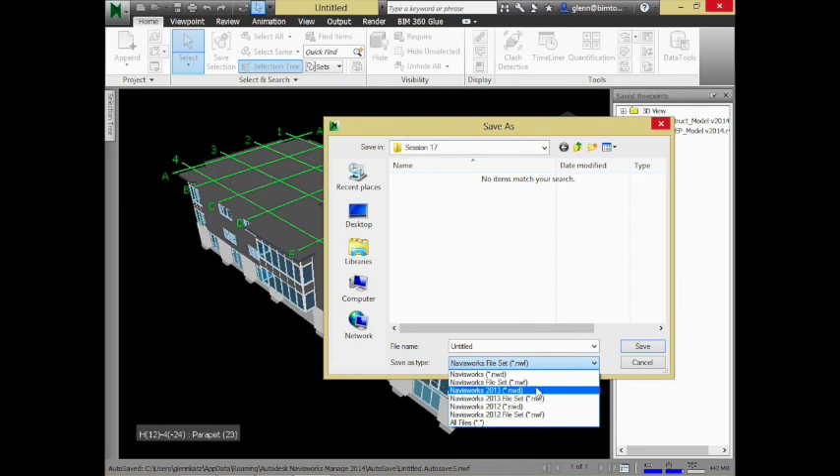Okay, yeah, so it does what you want it to do, which is, you set them up and then you don't have to keep on reappending. If you do this right, you'll only have to append and transform once, and then every time you open it, it'll always be up to date. Okay, let us break.